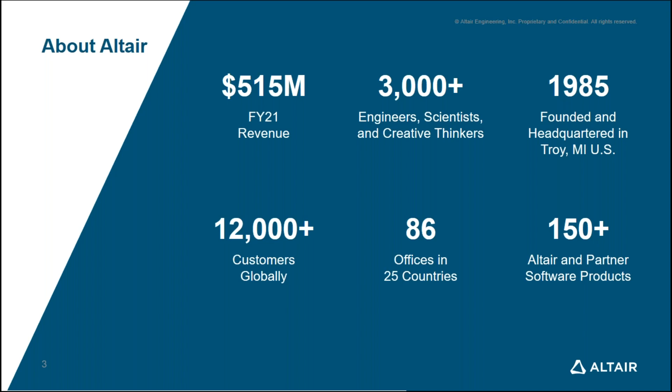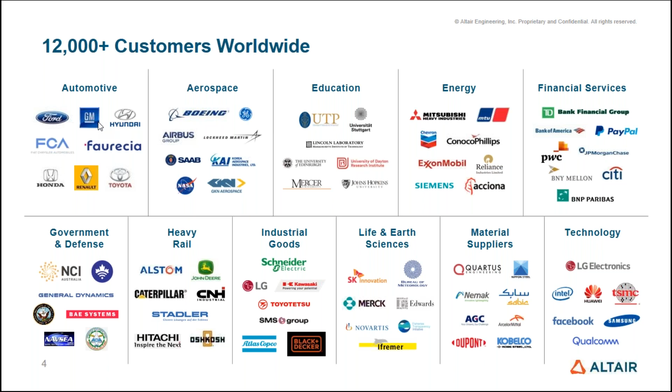But apart from that, over the period of 35 years, we added many technologies. We added various solvers which cater to various multiphysics simulations. This is a partial list of customers, be it any industry vertical, whether automotive, aerospace, education, or energy. So we have customers using our tools and technologies for various applications, not only automotive, but also defense, DRDO applications as well.

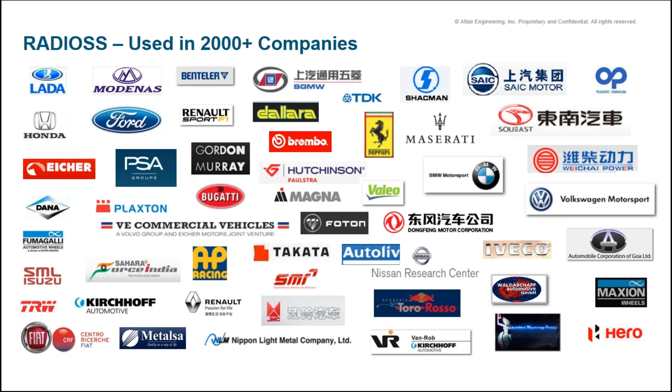If we talk about Altair Radioss, as I said, it's an explicit finite element solver, and currently it is used by almost 2,000 plus companies. You can see the names, not only OEMs, but also various tier 1, tier 2 suppliers in India. Altair Radioss is being used in almost 100 plus companies.

So why are people choosing Altair as a product development portfolio? Because we have various solutions starting from data analytics to various multiphysics simulation, and of course design modeling and visualization, which is our flagship product that always starts with Hypermesh, where you can prepare the deck for any kind of solver. The best part of Hypermesh is its ease of use, where you can create meshes for complex geometries, easily check the quality of the elements, modify it, and ultimately prepare your model well so that you get good quality results. So that is the design modeling and visualization.

For physics simulation, I will take you through the various solvers available in Altair, not only for structural analysis, but also electromagnetic simulation. That's an acquisition we did in 2014, where we acquired electromagnetic simulation capability - FEKO, which is used for high frequency electromagnetic simulation, and Flux for low frequency electromagnetic simulation. Nowadays, if you talk about trends coming into data analytics, Datawatch is a company we acquired in 2018.

The best part of this is even though you are a mechanical engineer, you don't need to have a coding language, because mainly this data analytics is used by computer science engineering students or professionals.

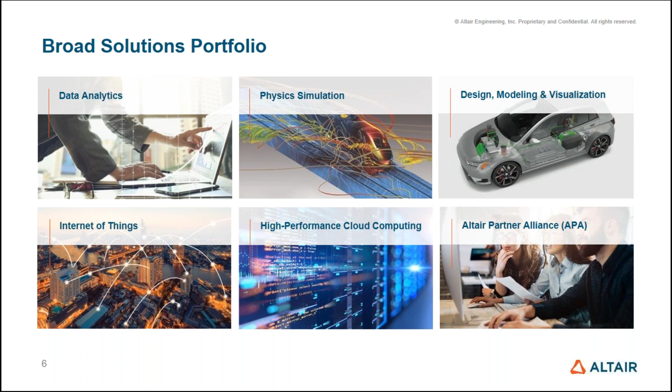And last but not least, we have tools and technologies for IoT as well. So this is the broadest range of product portfolio we are having right now, and this can be used for various applications.

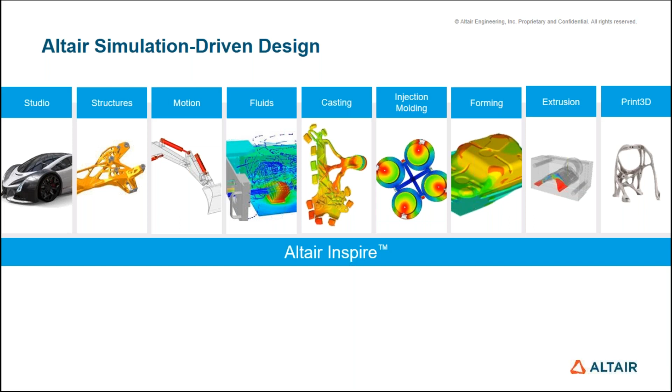For the fluid, we have AcuSolve, which is again included in our Altair simulation driven platform, where you can do the flow simulation and heat transfer simulation. And last but not least, we have the manufacturing feasibility and manufacturing simulation solver available in Altair, where you can do the casting process simulation, injection molding, forming, extrusion, as well as 3D print process simulation. So at the starting stage of your design, you are not only just doing the designing, but also checking the manufacturing feasibility, your complete platform for design engineers.

And then comes the multi-physics simulation, where, say for example, you want to do a complex physics simulation, so then you need to have a detailed CAE. So starting with our complete full-fledged MBD solver, where you can do the rigid body simulation as well as the flex body simulation. And from the structural analysis perspective, we have a couple of solvers named OptiStruct and Radioss. OptiStruct is basically used for applications where you want to do linear, static, dynamic, modal frequency response, fatigue analysis, as well as implicit simulation. And Radioss is specifically used for crash safety, impact, and blast simulation.

Apart from that, on the right hand side, you can see the thermal CFD capability. We have the manufacturing simulation. And at the starting stage of my presentation, I talked about the electromagnetics. So we have a complete product portfolio, and the best advantage of this is that you can couple these solvers at any point of time. So we are considering the complexity.

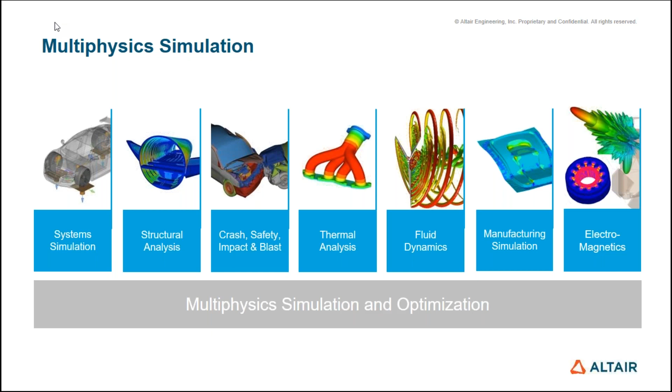The next stage is the motor design and validation. We have a dedicated platform named Flux, where we have FluxMotor as a motor design and simulation tool, where you can do the stator and rotor design, and you can calculate the electric and magnetic losses. And further, you can improve the motor performance in terms of efficiency. You can calculate the torque ripple, you can minimize it, you can find out the motor thermal hotspots, where you want to see what temperature is coming out from this motor while it is running. Then you can also consider these electromagnetic losses to check what vibration is generated by the motor. All these things you can do with the help of these solvers, that is Flux, OptiStruct, MotionSolve, and AcuSolve.

The next one is the battery design and validation. For that we have AcuSolve, where you can do the battery thermal management. Say for example, you have a battery pack, and in that you have battery cells. You want to see the temperature distribution on the battery cells, because the delta T, the temperature difference, is very important while designing any battery pack. It should not go beyond 5 degrees Celsius. So you are able to identify that and modify your design by doing the battery thermal management simulations.

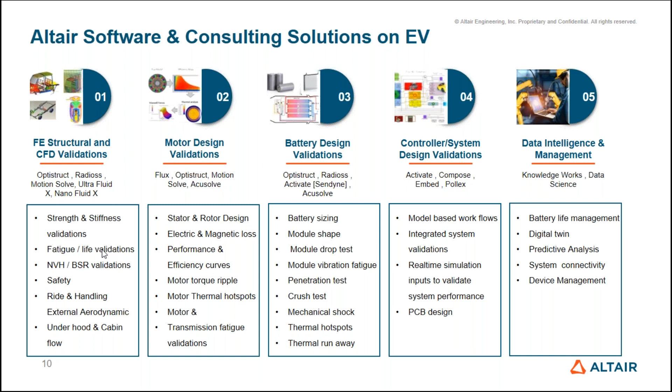So now coming back to the topic about Altair Radioss. So the first and most important thing is, as you know, explicit models or explicit runs are very compute expensive, because whenever you want to fire a job for the explicit simulation, generally it calculates the critical time step, and this critical time step depends on the average element size or the smallest element you have used in your whole FE model.

So if you have a complete vehicle level simulation, probably you have millions of elements, and that will actually hamper your solution time; it will consume a lot of time. So how to speed up the solution? The biggest feature of Radioss is scalability. So what do you mean by this? Say for example, you have hardware with 64 cores, and you want your explicit solver to scale up to that number of cores. Radioss doesn't have any limitation.

So you can see this is the case study presented by Ford, where they have used up to 2048 cores, and they have reduced a lot of time. And every version we have improved this scalability feature. You can see on the right hand side, we started this Radioss scalability from version 13, where on the x-axis is the number of cores used, and on the y-axis the time required to solve the problem. So every version we have done this comparison, and the current version 2021 is 30% faster than the past versions.

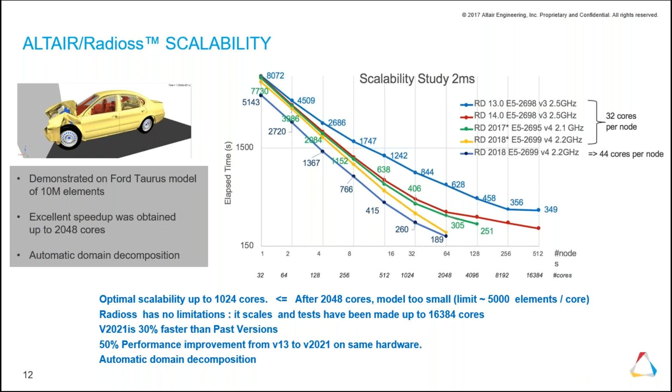So you can see one is the scalability. The next one is, say for example, if you are using parallel processing or many cores, then repeatability of the results is quite important, right? We have seen other explicit codes which are very vulnerable if you increase the number of cores. But with the help of the PARITH option, which is available in Radioss and is on by default, once you submit any explicit job in Radioss, this PARITH option gets on, and you will get repeatability of results.

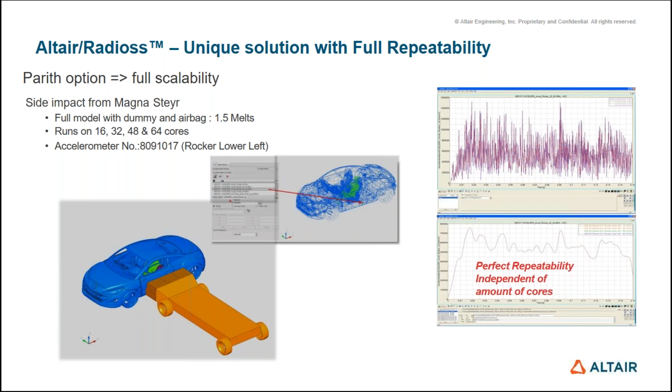So accuracy of the result will not get compromised even if you increase the number of cores. So that is the meaning of this repeatability. So that is again a big feature of Radioss. Independent of the number of cores we are using, you will get the same results.

The third one is the advanced mass scaling. So there are certain features available in Radioss where you can use this option to run the simulation faster. So what it does basically, it is actually adding artificial energy in your job while running the job.

So say for example there is a deformation, and if the deformation is going beyond a certain limit, generally in a normal run the solution will not get converged, or you will get an error. So with the help of advanced mass scaling, this is adding some artificial energy, but of course you need to check what energy gets added at the end of your run, because if this artificial energy added is more than the prescribed limit, then your physics is not proper.

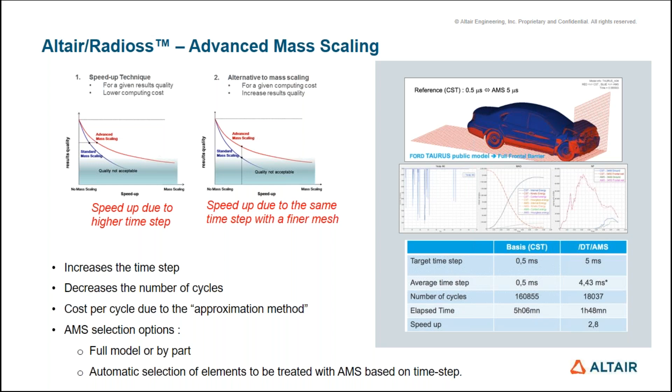So with the help of advanced mass scaling, you can reduce the solution time as well as not compromising on the physics. So that is the added advantage you will get with the help of this feature. The next one is we have the submodeling method as well. So say for example you are running your full model, say a particular crash test, then it will take a lot of time.

So to reduce that solution time, you can use this submodeling method where you can create a section. The main domain is there and you are creating many subdomains, and we are running the subdomain, where you are capturing the force and moment data on the section boundaries, and then further you can cross check it with your full vehicle run.

If it is correct, then only you can go ahead and run multiple iterations with these submodel options. If it is not correct, then again you have to check the cross sections you have created. So this subdomain option is also available, or multi-domain I would say.

So there are different terminologies used as per the solvers, but we have this option available where you can create these subsections. You can generate the force and moment output on the boundaries of your sections, and then further you can do various iterations and verify your final design. So that is the process available in our Altair Radioss.

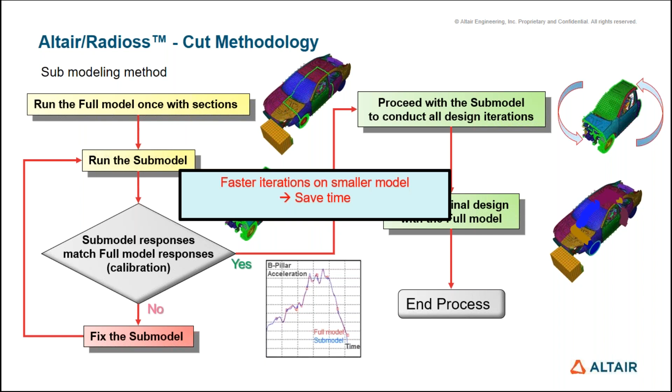The next one is a case study from Ford where they have used this kind of approach, where they want to see the battery design. The objective is to check the battery design, but if you run the full vehicle model and you want to include the detailed battery subsystems, the battery cell and battery packaging, then it is very difficult to include all these details.

So that's why they have used this multi-domain approach, where they created a box-like section while running the full vehicle simulation, capturing the crash simulation data on the boundaries of this box, and then the battery core team used this data for the detailed analysis. In that process they ultimately achieved a 50% reduction in modeling efforts, as well as reducing a lot of time.

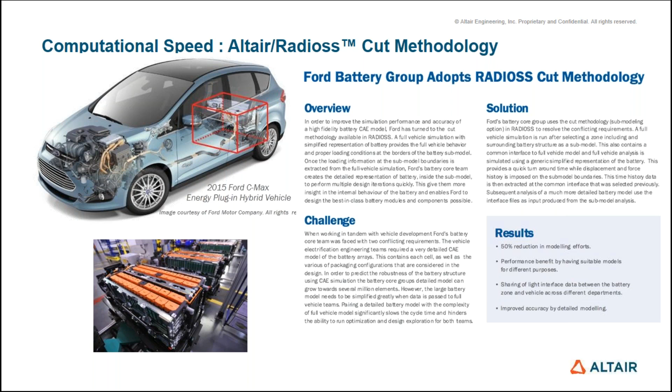So these are the approaches we have to reduce the time to run the simulation. One is number of cores, scalability, the repeatability. The third one is the advanced mass scaling option, and the fourth one is the multi-domain approach.

The next key feature of Radioss: of course, any explicit simulation you run, you need to have various material models, because say for example you have a steel kind of material, within the elastic limit there is certain deformation, but once it crosses the yield, there is plastic deformation, so you need to consider that phase as well. For that you need to use an elastoplastic material model.

So for all alloys, you are using elastoplastic material models; and for the brittle, for the glass, for the composite, you need to have these material models. Apart from that, you need to consider the failure criteria as well.

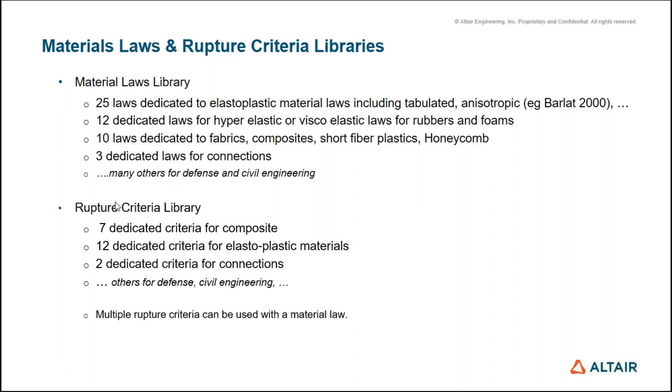So we have almost 300 plus material models, starting from elastoplastic to viscous, hyperelastic, for honeycomb, for fabrics, composites. So all the material models are available along with the rupture criteria library. There are almost 300 combinations we have in Radioss which you can use for your complex physics simulation.

These are some of the specific material models used for the automotive industry. Say you want to check the failure of your windshield; basically you need to have a particular model. That material model we have is called FailAltair. This is basically a failure model for glass. It is developed by Dr.

Christian. Then for the battery cell, we again have a failure material model available, which basically uses a homogenization technique, so you can use it for your battery cells. So all these specific material models required by the automotive industry we have.

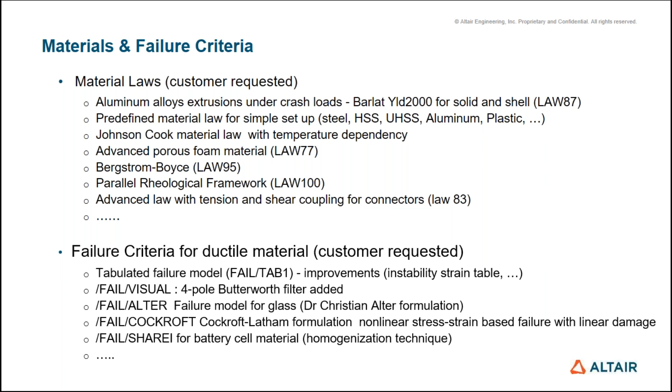For rubbers or hyperelastic materials, we have various material models like Ogden, Mooney-Rivlin, Neo-Hookean, Arruda-Boyce. All these material models are available, and these are the models basically used for the tire industry as well as bushings. So all these material models are available.

This is again a unique feature with Radioss. Say for example the user doesn't understand these material models; there are some predefined material models available in Radioss. Say I want to consider elastoplastic, and then steel as a mild steel material, so you will get the required parameters. These are the predefined material models available that you can use at your starting stage.

Once you are familiar with Radioss, then you can check the particular material model, but these predefined material models are available for the initial users who just learned Radioss and want to run explicit simulation.

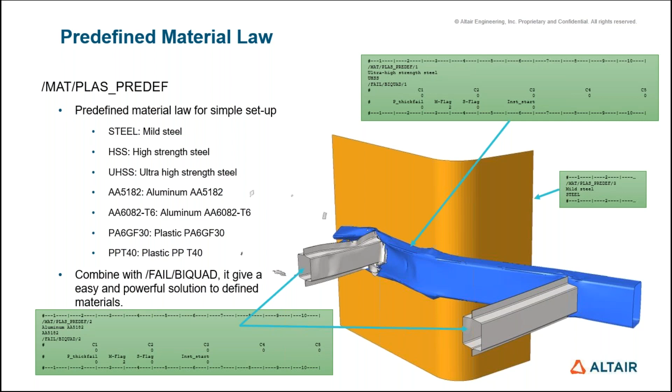So all these predefined material models we have, and these models you are using for various simulations, and you can see the scalability as well as repeatability we have checked for one of the cases. Almost 13,824 cores are being utilized for checking this predictive failure analysis of one of the structures, and you can see there is a lot of time saving.

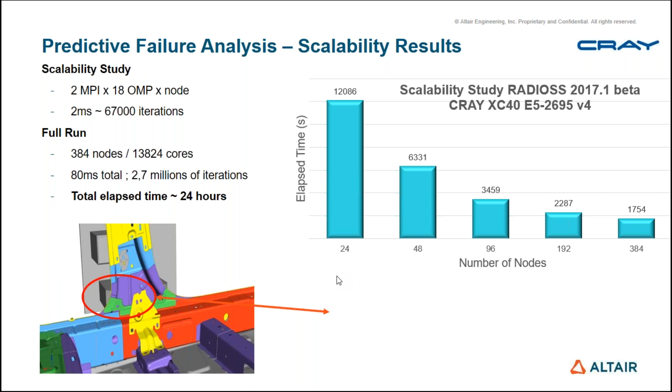The next one: Altair has windshield analysis. If you want to see the windshield behavior, you can use this FailAltair material. Here, the glass is modeled with shell elements and the PVB foil is modeled with solid elements. Once the impact takes place, how the crack is initiating and how it is propagating, you are able to check with the help of this failure material model.

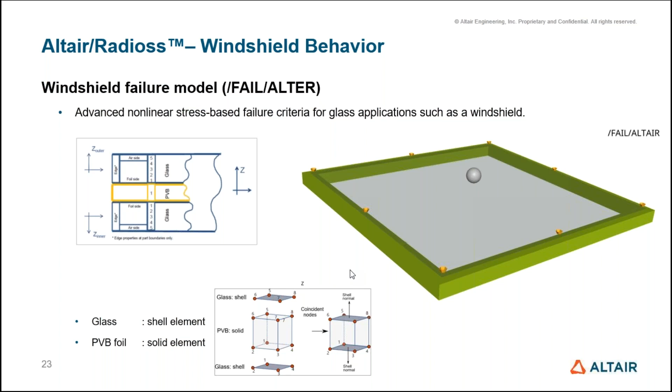We have checked it for the outer layer as well as the inner layer, so you can see the crack initiation as well as the crack propagation with the help of this FailAltair model. On the right hand side are the fracture patterns from the actual physical head impact test. The left one is the experimental, the middle one is the exterior glass layer, and on the right hand side, the interior glass layer. So there is a close comparison between the physical and virtual simulation.

So the solver accuracy of Radioss is pretty good, because ultimately the backbone of getting accurate results is a good quality FE model, and you can build this good quality FE model with the help of HyperMesh.

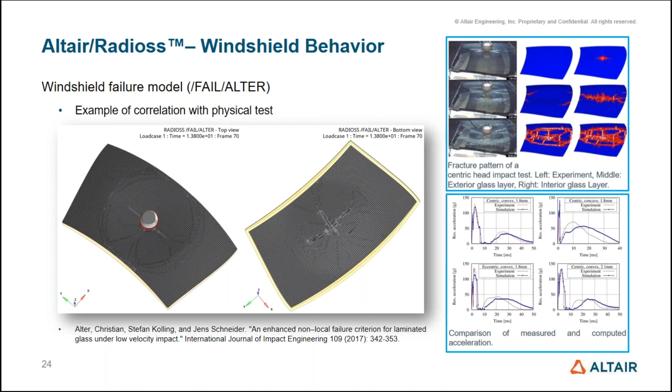Then next comes battery cell analysis. Say you want to develop your battery cells; these are basically the tests done for battery cell testing. You need to see the mechanical aspect as well as the electrical aspect, because if you do the compression test, indentation test, or 3-point bending test, you are mapping the mechanical deformations, but there is thermal runaway,

and because of that the power ratio gets changed, so the electric property also you need to map, because if this ratio changes beyond certain limits, then there is a failure, and there could be an accident in terms of fire or explosion. All these tests you are able to do with the help of Radioss, so you can do the mechanical aspect as well as electrical aspects.

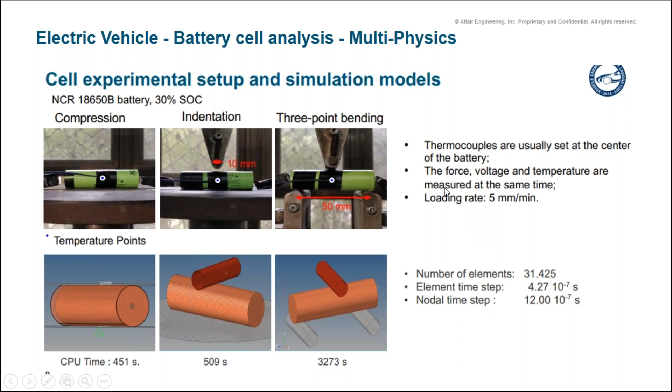Once you do the mechanical virtual simulation, you calculate the deformation, and further you check the thermal runaway, and use that for your thermal simulation, and you can predict the battery life or battery structural integrity. You can see these are the tests we have done.

We published a paper along with the MIT battery research group between 2016 and 2019, where we set up a complete workflow checking all the mechanical analysis as well as electrical analysis. These are a couple of tests we did, the compression test and indentation test. You can see the experimental results, where we calculated the forces as well as the temperatures, and then the simulation results with the forces and temperatures. There is a close match between the virtual and actual physical test.

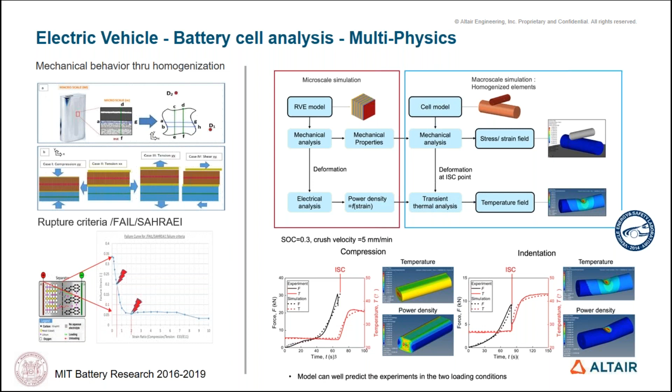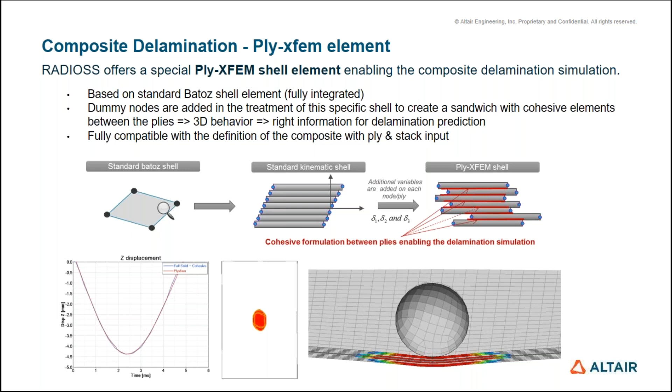Apart from that, we have the process called composite delamination. For that you can use our XFEM method, which is the extended finite element method, where you can check composite delamination by modeling your ply in HyperMesh. You use the formulation called Batoz, which is a fully integrated element, and consider cohesive elements to model the gluing of these plies. Further, you can check the shearing of these plies due to delamination with the help of this extended finite element method. These are all advanced algorithms available in Radioss.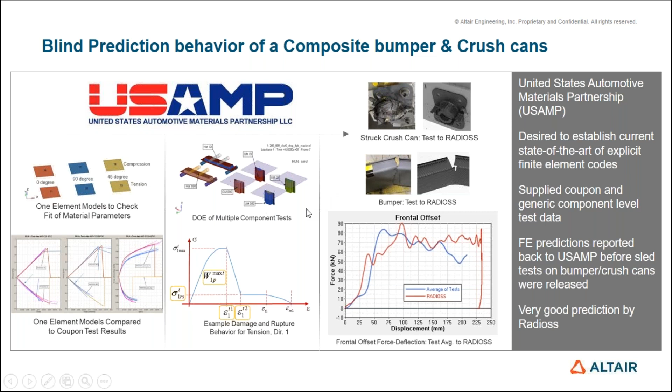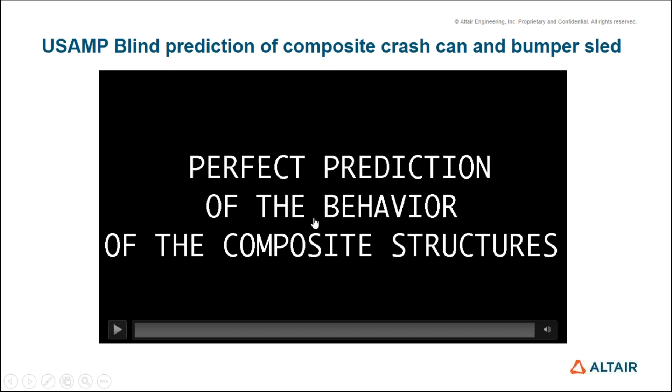Some of the benchmarks we have done with various organizations. This is the United States Automotive Materials Partnership, where they wanted to check solver accuracy. For that we have done a couple of tests, where we ran the virtual simulation and they checked it against actual testing. They are certifying some of the solvers for typical crash tests, like bumper crash tests. These are some animations you can see on the left-hand side showing the physical test and the virtual simulation, with a complete close correlation between the physical and virtual simulation.

The next one is Altair Radioss for airbags. From the safety perspective, we have a couple of methods available: one is the finite volume method, another is the constant pressure method. Both methods are available, starting from modeling of airbags, and the folding of airbags, which is very critical—you can do that in HyperMesh and HyperCrash. Further, you can use algorithms like the finite volume method or constant pressure method to predict how the airbag gets deployed and whether the folding needs to be corrected. Everything can be checked with the help of these methods. The finite volume method is essentially a pure CFD method that is included in Radioss.

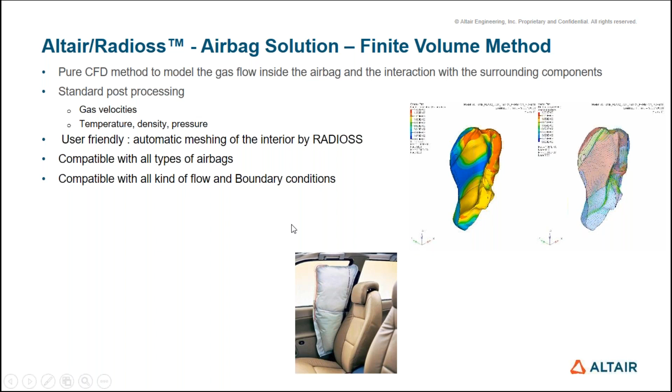You can also check the flow inside the airbag, as well as the interaction with surrounding components. Generally, once you run the simulation, you check gas velocities, temperatures, density, and pressure, and this is a complete automated workflow. You can use either HyperCrash or HyperMesh for modeling. These are comparisons we have done between the uniform pressure method and the finite volume method, and you get quite accurate results with both algorithms.

This is a case study from passenger occupant safety simulation done by SAE International, where they found Radioss to be a quite good solver for predicting this kind of simulation.

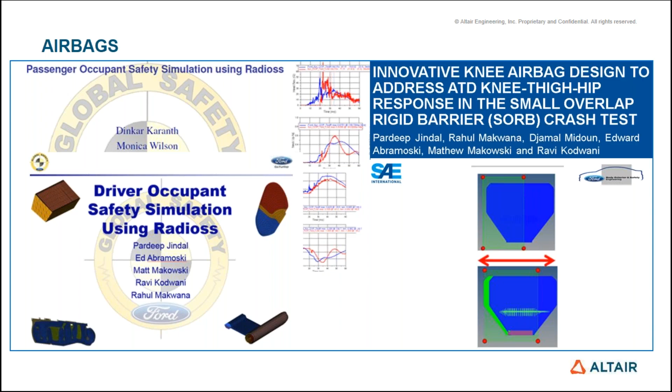The next one is Altair Radioss for manufacturing. Generally, if you see any automotive vehicle, the major components are stamped ones, manufactured with the help of sheet metal forming. In sheet metal forming, you first need to identify the blank size. For example, when forming a component, you do a feasibility analysis where you identify the blank size and blank thickness. Then, if you want to find out how many stages are required to form this particular component, you do an incremental analysis.

Altair Inspire Form helps you do the forming simulation. During this forming simulation, residual stresses and strains generally get developed. If you don't consider these residual stresses and strains while doing the crash simulation, you are approximating your predictions. So once you do the forming simulation, those residual stresses and strains can be considered in the crash simulation—this integration is possible in our interface, and you actually get a better correlation with respect to test. There are many companies using our sheet metal forming simulation, and some OEMs use this Inspire Form to Radioss workflow to get better correlation.

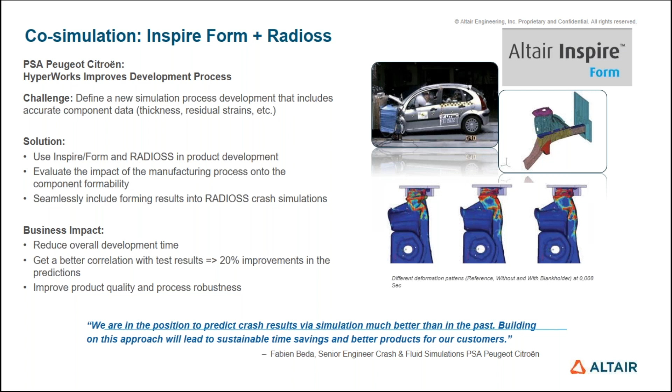The next one is using manufacturing simulation data for the casting process. Here you can see a casting of an aluminum rim, where you check and identify casting defects, and further map those results for a SORB test, which is a small overlap rigid barrier test. If any casting defect is identified during the casting process simulation, you then carry that into the SORB test, so you are considering the correct physics and getting accurate results.

Inspire Cast is one of our manufacturing simulation platforms, where you can check casting feasibility and whole casting process simulation. Various smart workflows are available for gravity die casting, high pressure die casting, and low pressure die casting. Everything is available, and it's very simple to use.

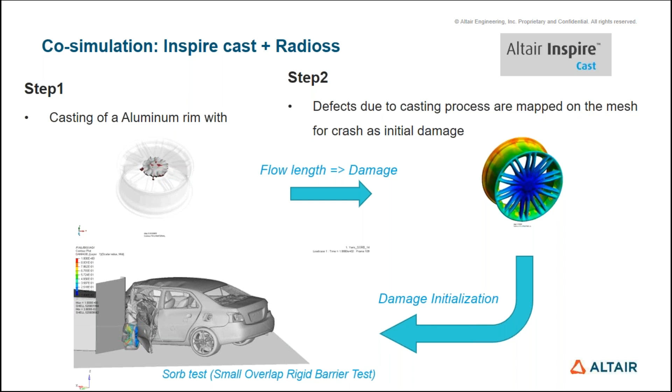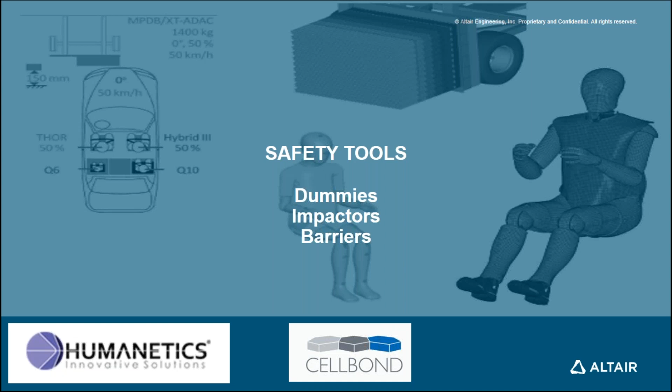The next one is the safety tools. For safety, we have tie-ups with a couple of companies: Humanetics, which most of you are aware of, provides physical dummies for crash tests, and Cellbond provides barriers, rigid barriers. These two companies have certified our solver Radioss, and they are providing certified virtual dummies as well, so we have various dummies available.

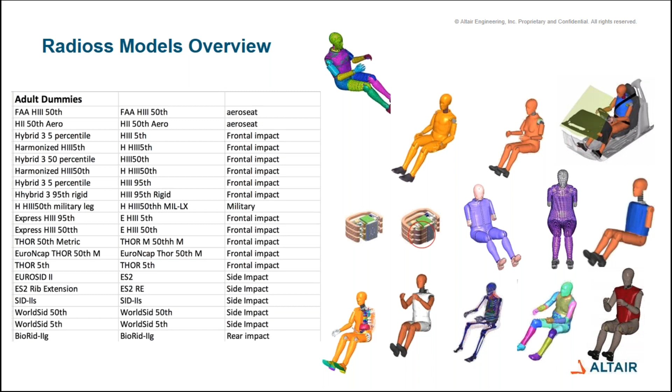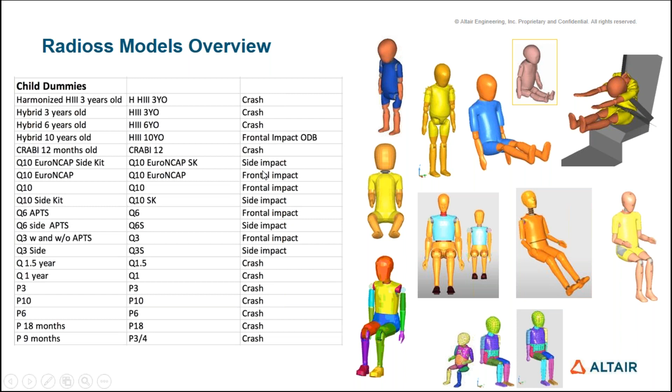We have adult dummies used for various simulations, whether frontal impact, side impact, or rear impact, so various dummy models are available. We also have a bunch of library for child dummies, along with various models available for simulations like side impact, frontal impact, or crash simulation.

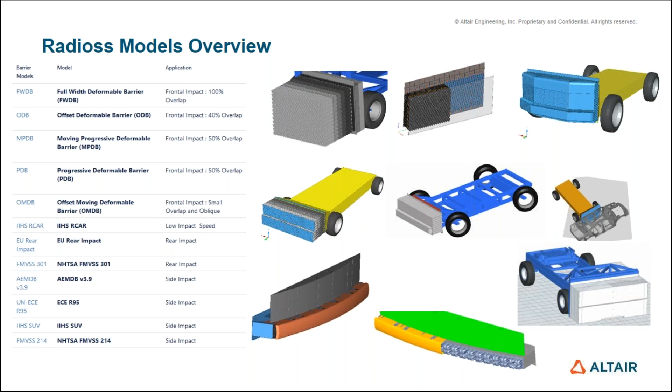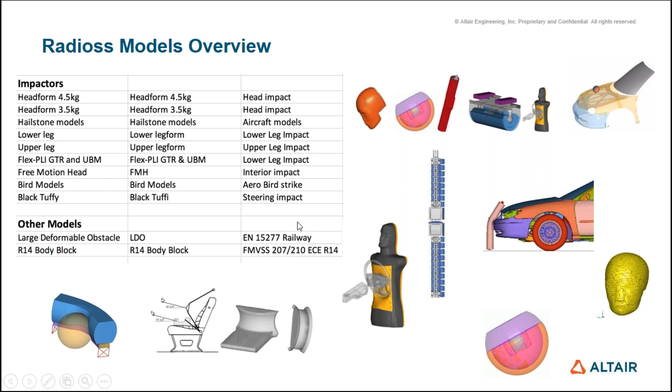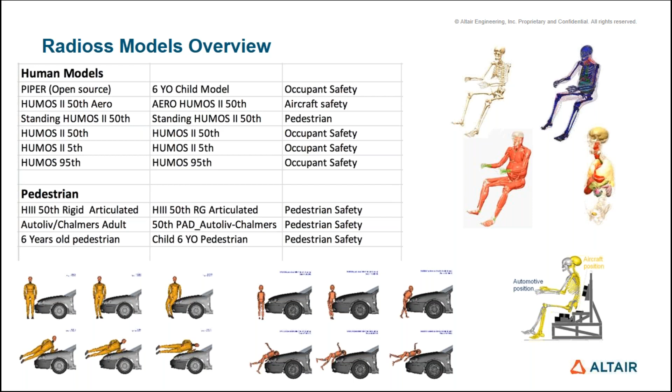Apart from automotive, we have various dummy models for railways as well as aerospace industries. All these dummy models are available, and they are all certified virtual dummies which you can use for your simulation.

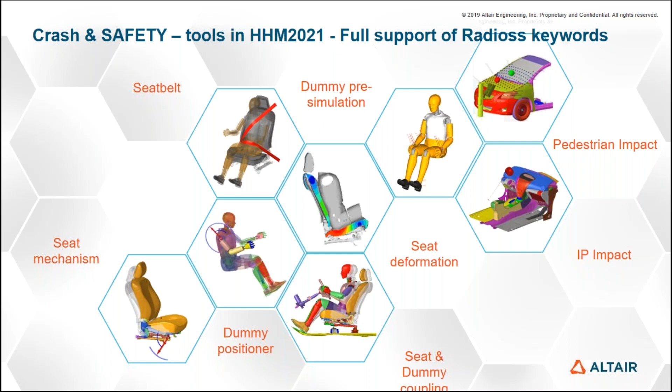Overall, I would say Radioss has complete applications catering to automotive, starting from seat belt, dummy positioning, seat deformation, IP impact, crash and impact simulation, seat mechanism simulation, and due consideration of manufacturing feasibility. So it's a complete, proven solver.

If I say why to choose Radioss, there are 5 points. One is accuracy, where you get correct results because Hypermesh is a preprocessor used for generating a good FE model. The scalability—of course Radioss is scalable; IIT Kanpur has large clusters where they use our solvers to reduce solution time. The technical richness, in terms of unique and innovative features such as AMS, multi-domain, finite volume methods for airbags, and XFEM, extended finite element method.

Along with that we have optimization as well, so where you want to reduce the weight of your structure, we have algorithms like topology, topography, size and shape that you can use to reduce the weight of your structure without compromising the design constraints or design parameters.

Optimization is enabled, and the quality—of course the solver robustness gives you repetitive results. In every version we are adding new features, making our solver and interface more intuitive, so the user doesn't have to worry about what cards are required to solve a particular type of analysis. They can run it much faster with the help of smart workflows.